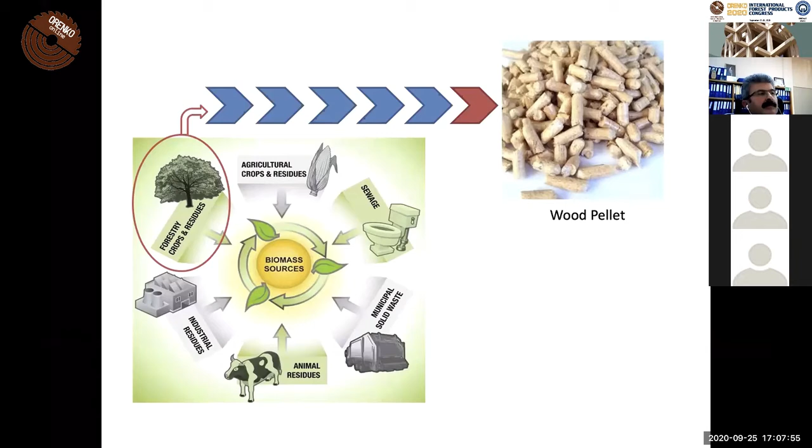Wood pellets are fuel chunks of 6-10 mm diameter that are obtained by drying wood waste that is ground to make sawdust and compressed under high pressure. Densification consists of three stages: drying, grinding, and pelleting. Sawdust, which initially has 50–60% moisture content, is oven-dried to reduce the moisture content to 10%.

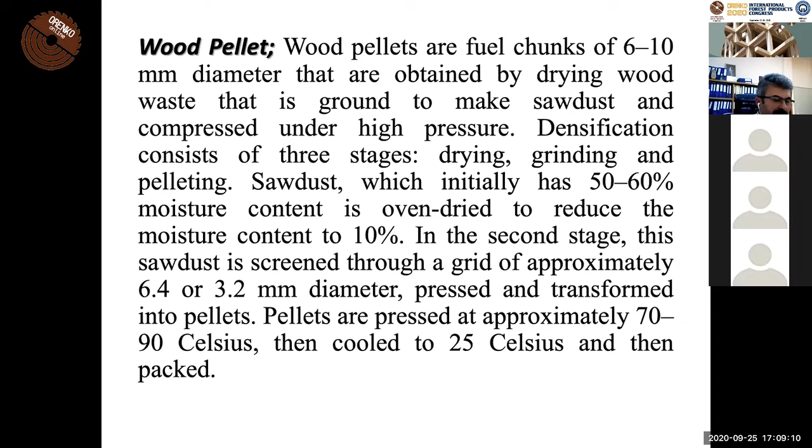In the second stage, this sawdust is screened through a grid of approximately 6.4 or 3.2 mm diameter, pressed and transformed into pellets. Pellets are pressed at approximately 70–90 Celsius, then cooled to 25 Celsius and then packed.

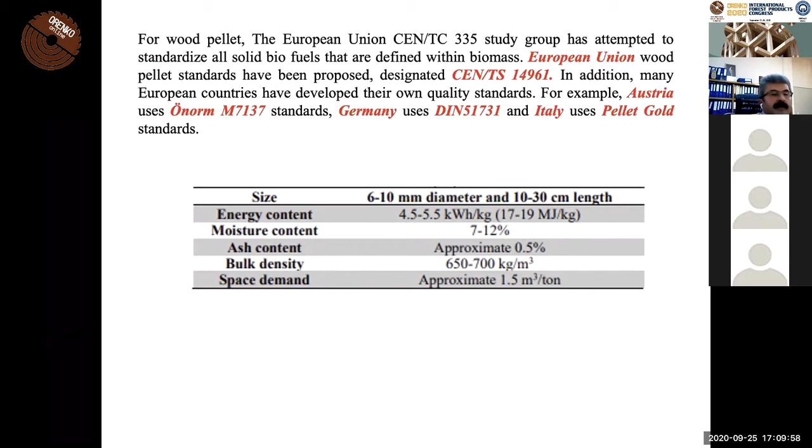For wood pellet, the European Union study group has attempted to standardize all solid biofuels that are defined within biomass. European Union wood pellet standards have been proposed, designated CEN/TS. In addition, many European countries have developed their own quality standards. For example, Austria uses ÖNORM standards, Germany uses DIN, and Italy uses Pellet Gold standards.

When we look at Turkey's biomass energy potential, biomass energy in Turkey is classic oriented and mostly used as fuel without any commercial purpose. Biomass energy fulfills 25% of domestic energy production. You can see Turkey's classic and planned biomass energy generation on the table.

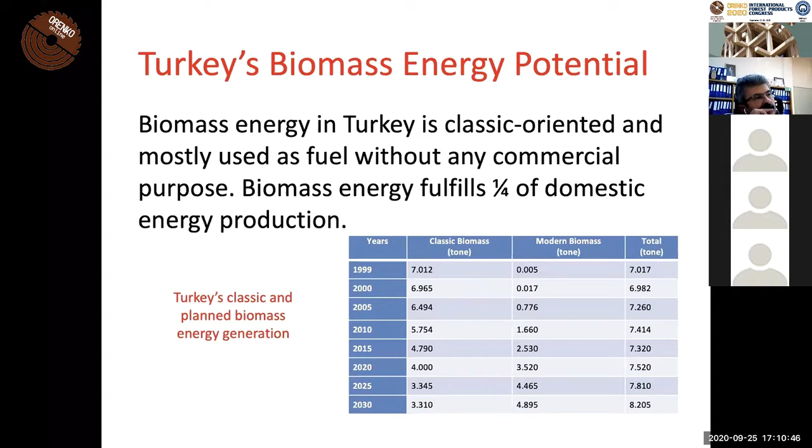Forest wastes are crucial sources of biomass. Commercial forestry activities produce waste biomass in the form of twigs, roots, pine cones, peelings, forest undercover, and bushes. Woody biomass from forest tending and thinning activities in some regional directorates of forestry are chipped and used in the production of particle board or as a fuel in heating systems.

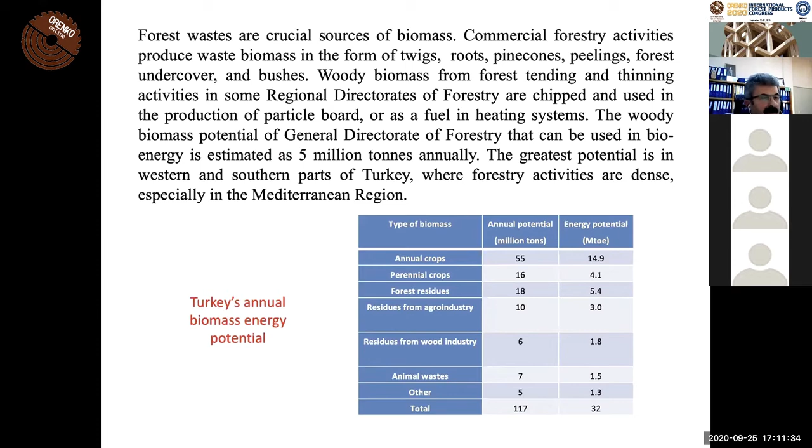The woody biomass potential of the General Directorate of Forestry that can be used in bioenergy is estimated as 5 million tons annually. The greatest potential is in the western and southern parts of Turkey, where forestry activities are dense, especially in the Mediterranean region. You can see Turkey's annual biomass energy potential on the table.

The forest sector has been expanding in Turkey. Industrial wood production reached 22 million and fuel wood reached 5.6 million. Approximately 50% of the trees that are cut for production consist of parts that cannot be utilized as industrial products. So, approximately 10 million of forest waste can be obtained from 22 million of industrial wood production.

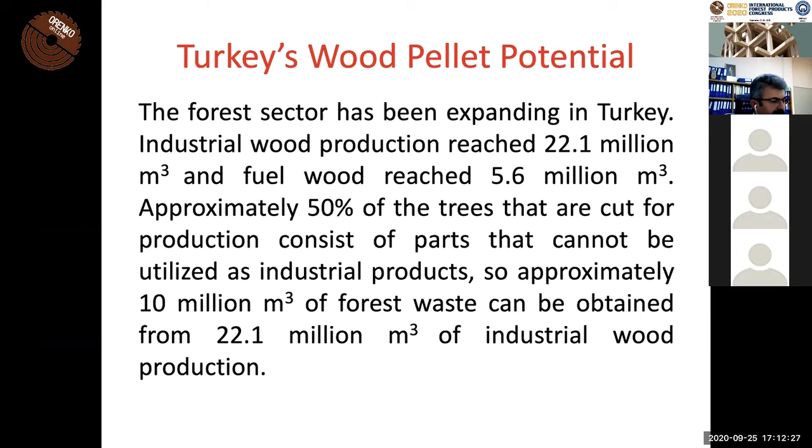According to studies, 5 steres of forest wastes are equal to 1 ton. In this context, approximately 600 kg wood pellet is produced from 1 ton wood. According to our calculations, 6 million tons of wood pellets are produced from 10 million tons of woody biomass, with a market value of approximately $1.1 billion.

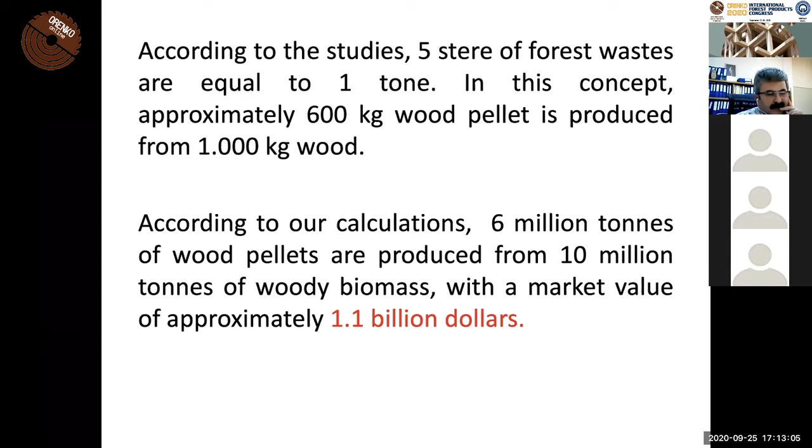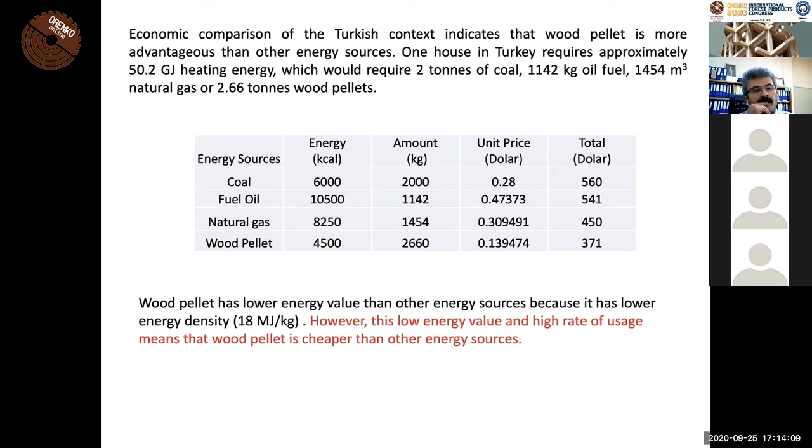Economic comparison of the Turkish context indicates that wood pellet is more advantageous than other energy sources. One house in Turkey requires approximately 50 gigajoules of heating energy, which would require 2 tons of coal or 2.6 tons of wood pellets. Wood pellet has lower energy value than other energy sources because it has lower energy density. However, this low energy value and high rate of usage means that wood pellet is cheaper than other energy sources.

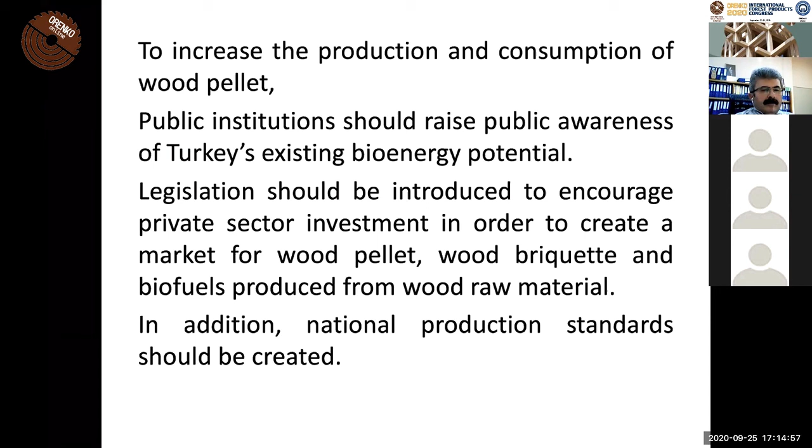Finally, Turkey has to increase the production and consumption of wood pellets. Public institutions should raise public awareness of Turkey's existing bioenergy potential. Legislation should be introduced to encourage private sector investment in order to create a market for wood pellet, wood briquette, and biofuels produced from wood raw material. In addition, national production standards should be established.